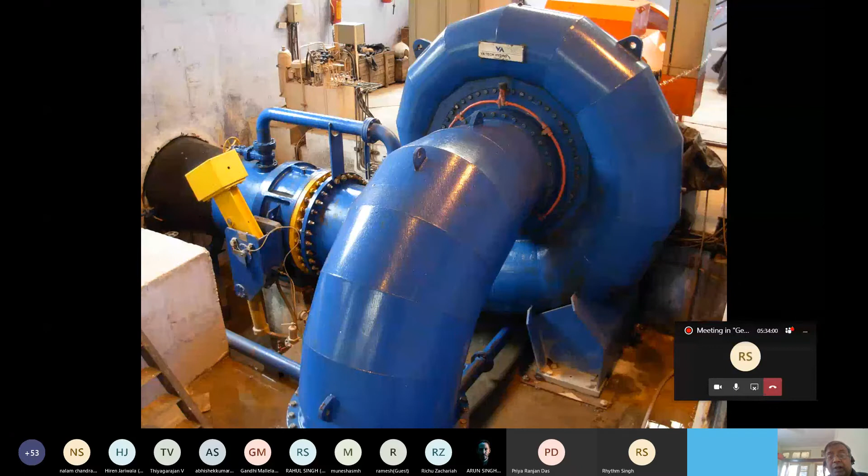Now, at the project we had this Francis turbine, and I told you in the morning. Now this is our valve which controls the operation of the machine with the signal coming from our governor.

So there are two controls here in this project - this is a fully open and fully closed position. And now in the Francis turbine, we had the wicket gates, which can - so there are two levels of safety here, which is there at all the projects.

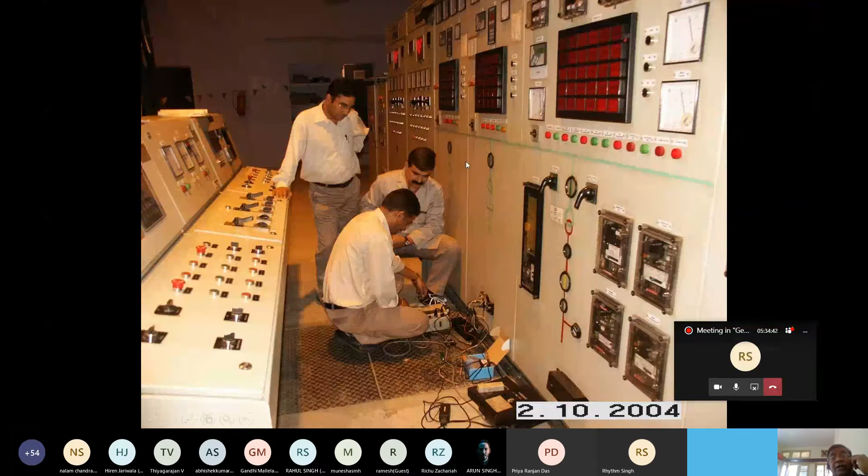And now these are the actual panels. You just see, and this is our IIT team.

These small hydro projects, when they are constructed at site, the subsidy which they are getting means they have to finally get all the project tested, whether they are generating as per the requirement, because it has been seen that getting a subsidy is based on the installation.

Suppose the project is of 10 megawatt, so they just prepare the report for 20 megawatt, so that the subsidy which was linked on the installation base - their contribution of 30%, because the project cost up to 30% is to be borne by the developer. Balance they can get funding from the state government, the financial banks, and around 1 crore per megawatt is a subsidy which is available from the central government.

Just to get a subsidy, they are inflating the installed capacity. So the government had decided that the final generation - if suppose it is 10 megawatt, they had just mentioned in their DPR that this project will generate, say, that much million units - so they have to, after the machines are commissioned, show that it is generating at least 80% of the units claimed.

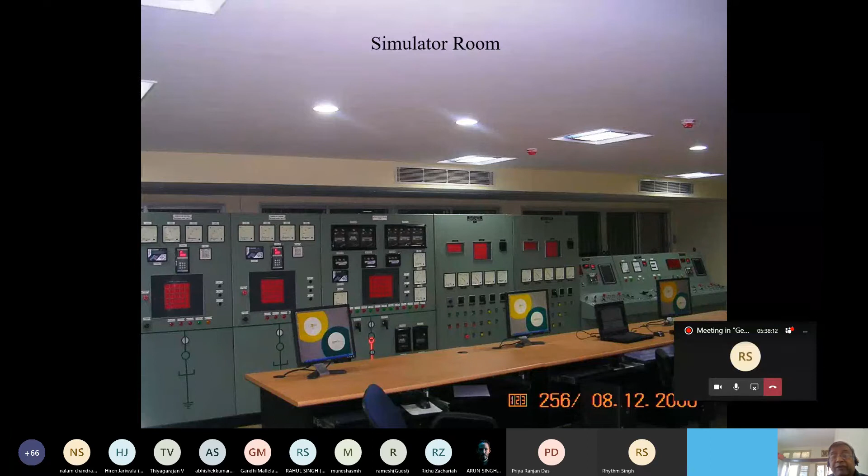When we commissioned this lab, we asked the operator from Rajwakti project, and the second project is canal based, so we asked the operator from Rajwakti. Similarly, for other projects we asked the respective operators to operate the system as they do at their own projects, and they confirmed that all operations here are the same as at their actual projects. All these operations can be done from the hard panels you are seeing in front of you.

We are having three systems, and these can be operated from here also.

Now I will show you the other project, a canal based project where we have an axial flow turbine. This is the panel at the actual project at Narangwal, and this is the hard panel available in our lab for this project.

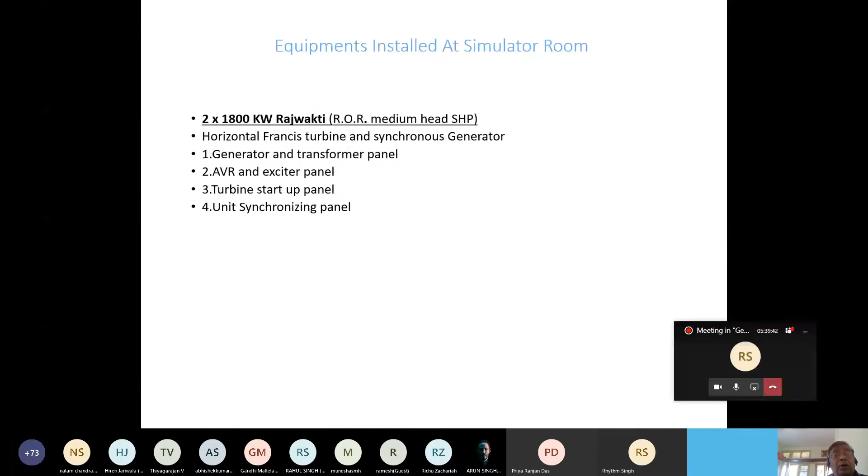We create a vacuum using vacuum pumps here, so the water gets lifted and falls over the runner blades, which start running. It is a vertical shaft with the generator mounted at the top. When we have to close these machines, we simply open the valve, break the vacuum, and then the water stops flowing.

These machines are very good because our expenditure on excavation is reduced, since they are around 2 to 3 meters higher and every machine part is above the water level. So if you want to repair or provide maintenance, there's no problem because the runner blades are above the water level, unlike normal machines where everything is underwater.

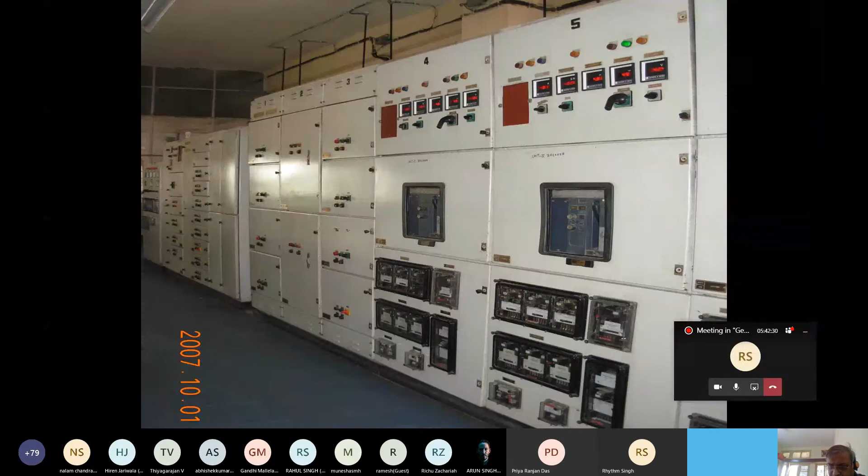Now, the panel you are seeing here: the actual panel and our panel show no difference, giving the same feeling as the control room of that project.

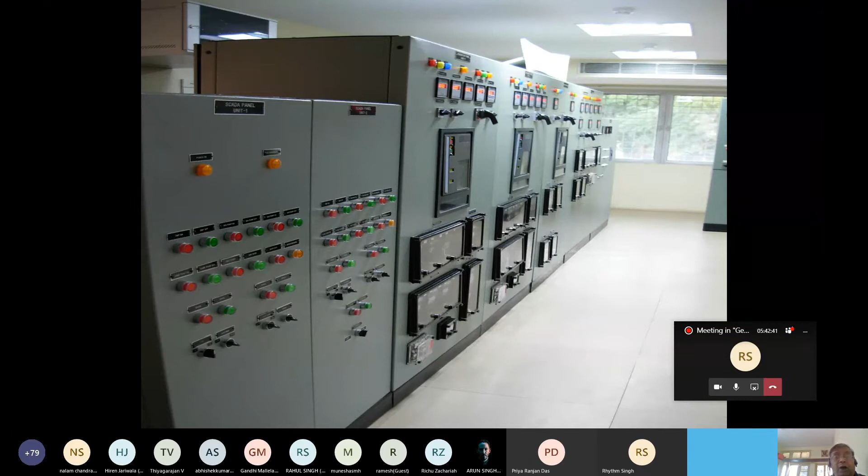The operations we simulated are the normal operations we discussed: the gate moving from 0 to 100%, so the discharge goes from 0 to the no-load position, developing runaway and rated speed, and then from there to full load, arranging discharge, since the discharge at your project can vary from maximum in summer to minimum in winter.

Hello, hello, please, is there any question?

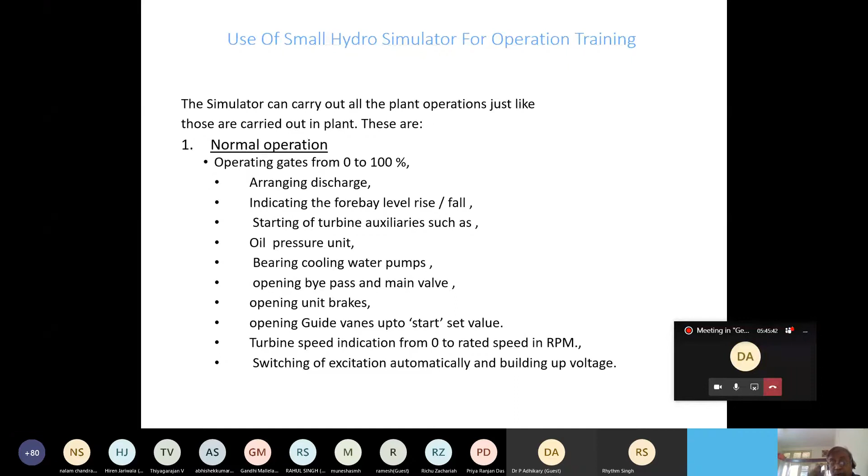So all these things are normal operations which you can perform in our simulator lab - opening unit brakes, opening guide vanes, turbine speed indication, switching of excitation system.

Now here the important part is the abnormal and emergency conditions. In a simulator, the advantage lies here - the malfunctioning of equipment. You have provided so many relays, and you keep assuming these relays are functioning well, but you don't know what will happen if these relays don't function.

What happened? When there was some tripping, there was a command that all equipment should be closed. So they closed the passage of the steam also. What happened? The pressure of the steam was building up, and finally it blasted.

So similarly here, what we do - we have simulated around 130 malfunctions which we can perform here. What we can do, because our project should work with cooling water, we cannot allow testing what happens if cooling water is not available in reality.

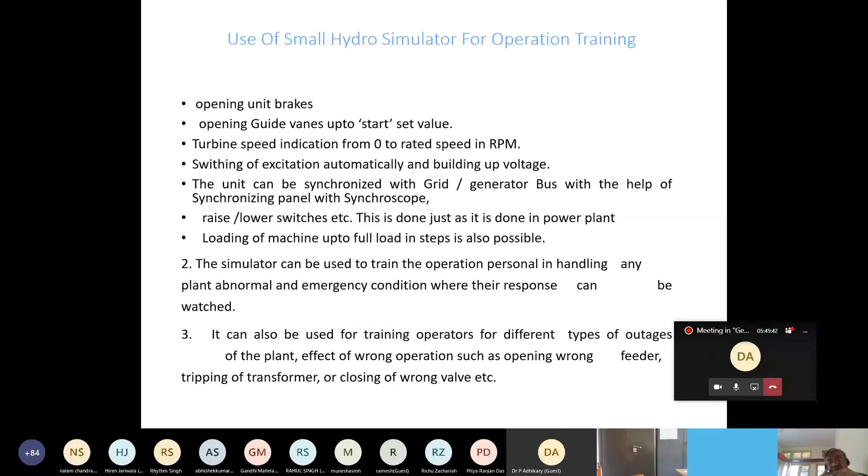So this is a simulator. Now I will show and discuss about the Rajwakti simulator screen, how it is working here.

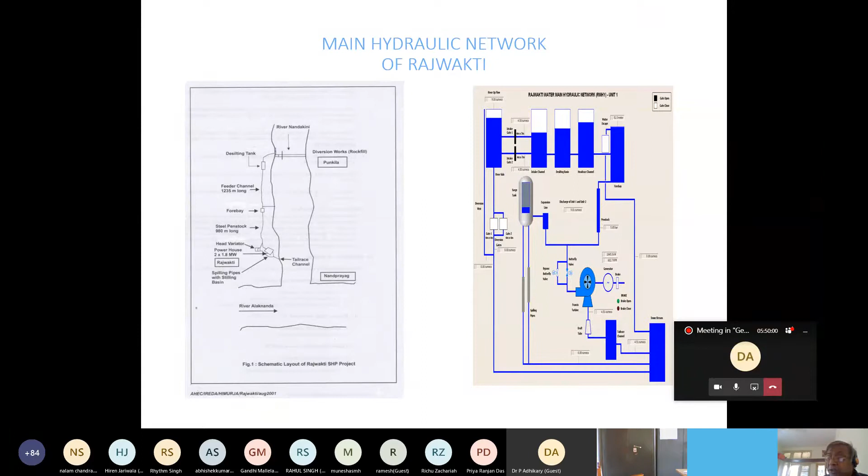On the screen you will see this figure. On the left side is the actual project at site, which is simulated graphically on the right side. Now you are seeing this is our river.

These three tanks represent the intake channel, the desilting tank, and the power channel. This fourth one represents our forebay. When the water level in the forebay rises, it comes through this spillway.

Water finally goes to the downstream side of the river. Now from this forebay you will see a penstock. This penstock supplies water to our turbine. From the turbine it goes through the draft tube into our tail race, and the tail race finally joins the downstream of the river.

Now this is a surge tank. What happens is when the machines close suddenly, the pressure rises and water passes through. So this surge tank has escape channels - this is incoming to the surge tank, this is outgoing from the surge tank, and finally water meets the river downstream.

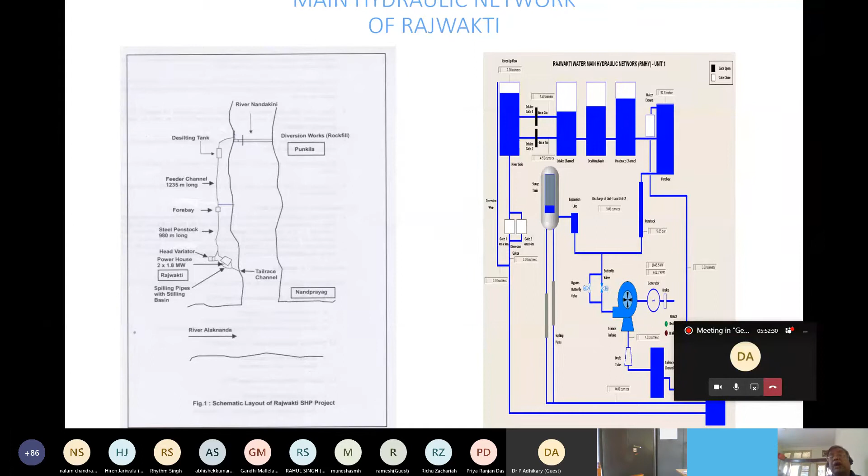So any variation which I had discussed earlier, all these variations can be reflected graphically by seeing the water level changing in the channel. It will take the same time as if you open the gate in the actual project - reaching the desilting tank, then reaching the forebay tank. Everything is simulated like this.

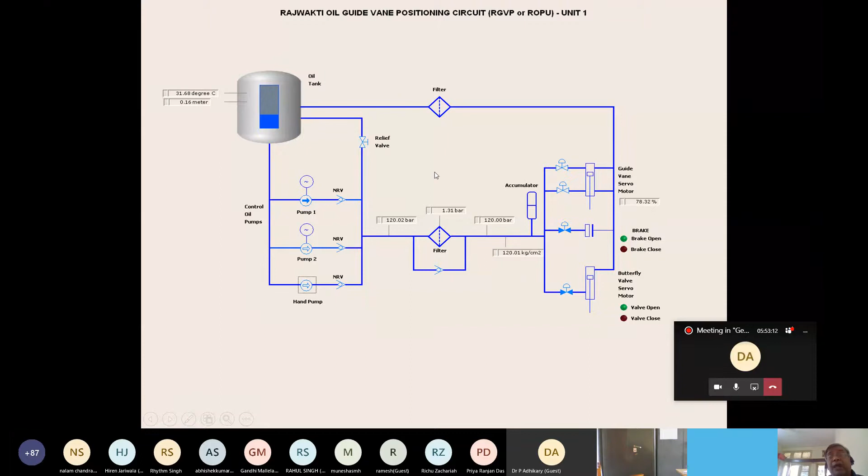Now this is the guide vane positions circuit. In the guide vane position you have oil in the tank, and you have a pump, because the servo motor needs a pump to pressurize the oil at the required capacity. These are the filters - basically we have two filters, because if one filter is choked, the supply comes from the other filter. This system is shown here.

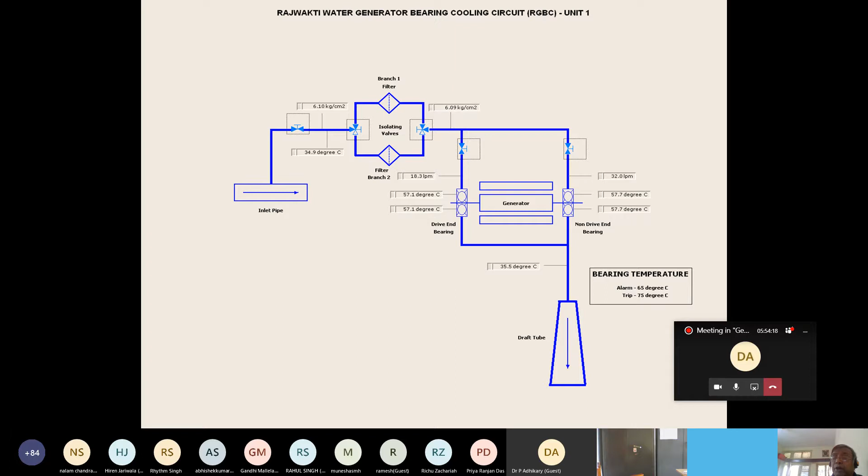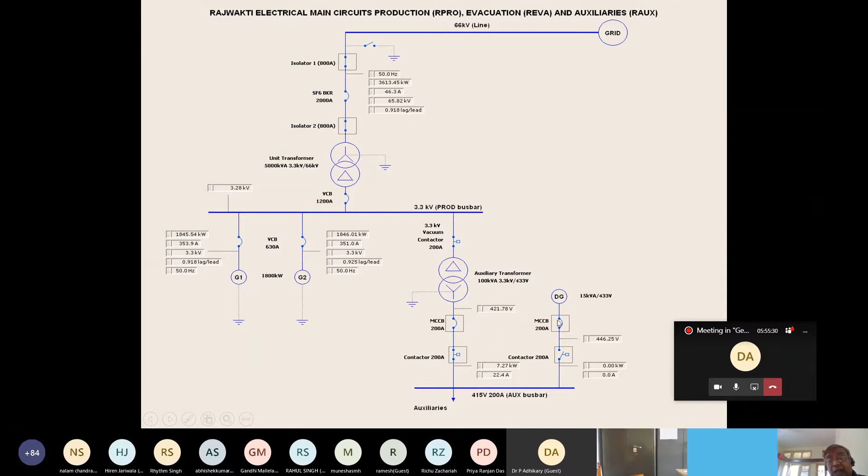Now on this side we have auxiliary transformer parameters, all displayed here. As you might know, on the auxiliary side, if initially we don't have any power, or if there is no power from the grid, we have a DG set. This is our 415 bus shown here, which is supplied to the 415 bus, and all the auxiliary systems are displayed.

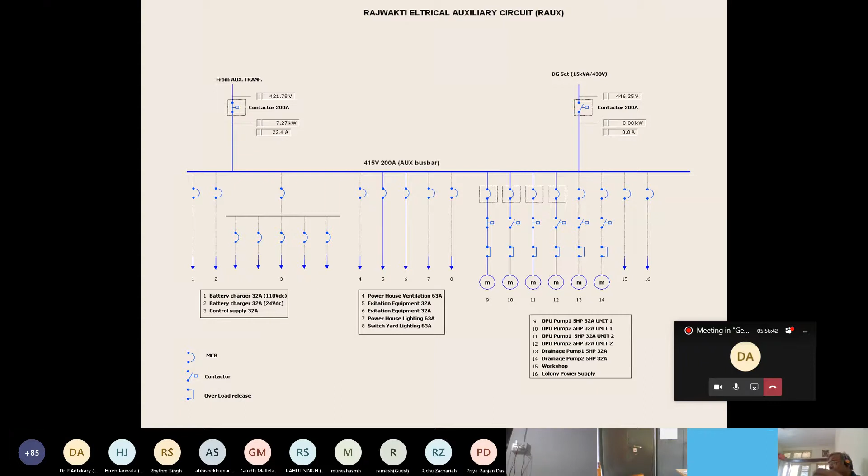So now if you have any question, or you know - earlier we used to have one course every month. This was free, funded by MNRE, and we had arranged some courses for Punjab State Electricity Board on their demand, changing the course content as per their need.

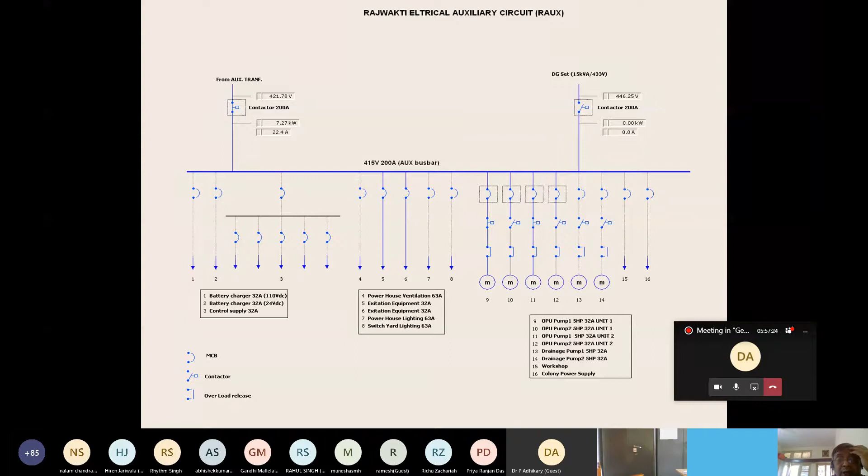So now this is the modeling part which we covered in my morning session. First we covered about the water starting time, about the velocity which will reach in what time, and I discussed about the classical function. This I had shown in the first example and discussed in the morning, that gate opening at rated load is not full, it is 94%, because the equipment supplier wants to have some margin for the opening of the gate to adjust their efficiencies.

Because when we purchase the equipment, all our parameters mentioned in our tender document are guaranteed. And if there is any shortfall in the efficiency, there is shortfall in the output, so it is penalized.

Actually, shortfall in the efficiency can be compensated by drawing extra water from the project. But if your machines are of poor quality, so generally acceptable efficiency of the machines is around 85%. And if the machines are of poor fabrication, poor quality, their efficiency can be in the order of 60%.

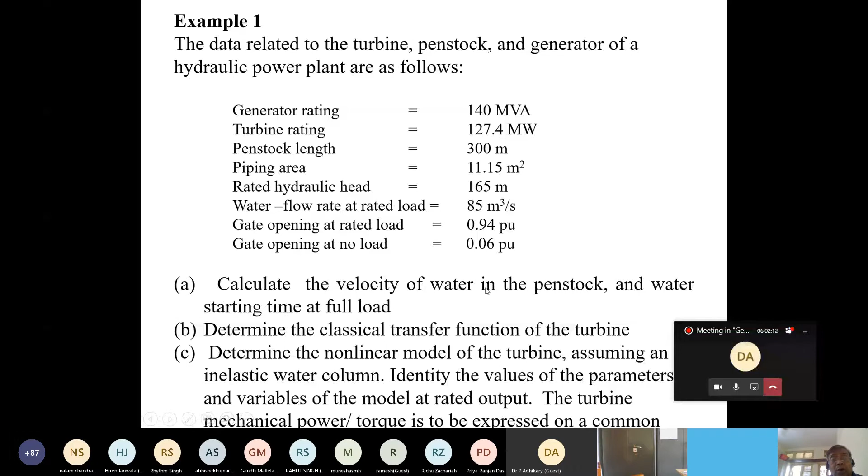So now if we had the parameters of this project, and if we have to develop a model of this project, I had calculated those. It is very easy to calculate the rated speed, because it is required to calculate the water starting time.

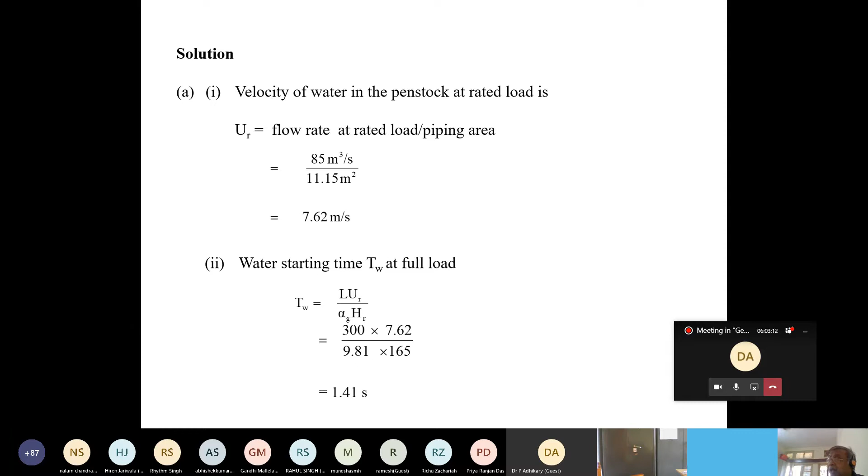Now, after that, we had calculated this parameter of our no load velocity. Just see at no load velocity will be here, and for our MVA base, we had taken 100 megawatt project as a base for this grid, just to know the effect of these projects on the overall grid.

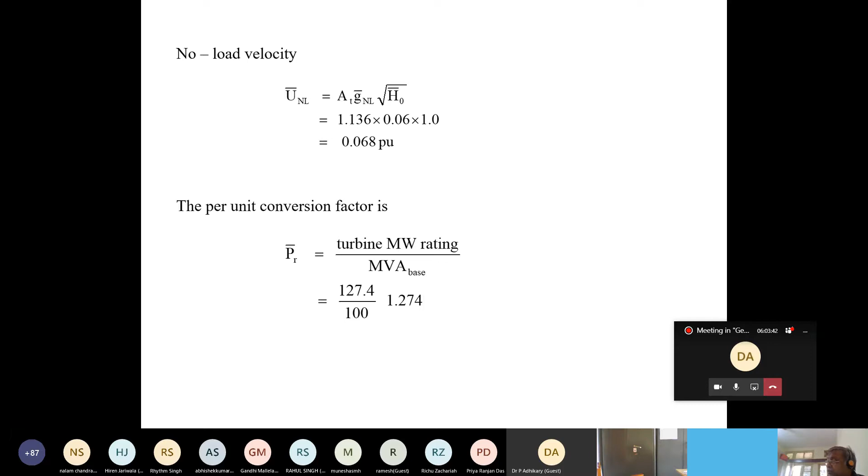In the second example, I had shown you the water starting time and the mechanical starting time. This was around 5 times higher than the water starting time. It means the machine requires a time to reach rated RPM that is around 5 times the time required for the water to reach the rated speed. So for that, we want to find out the governor parameter.

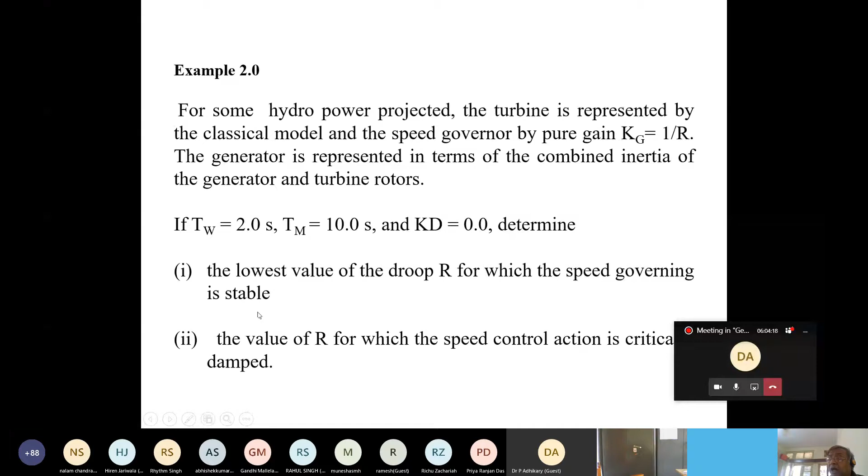This is the transfer function of our governor. This is the transfer function of our turbine. This is the transfer function of our generator. So this should finally be 0. We will get an equation which will give R, the gain which we had discussed, that is the ratio of gate opening and speed sensing.

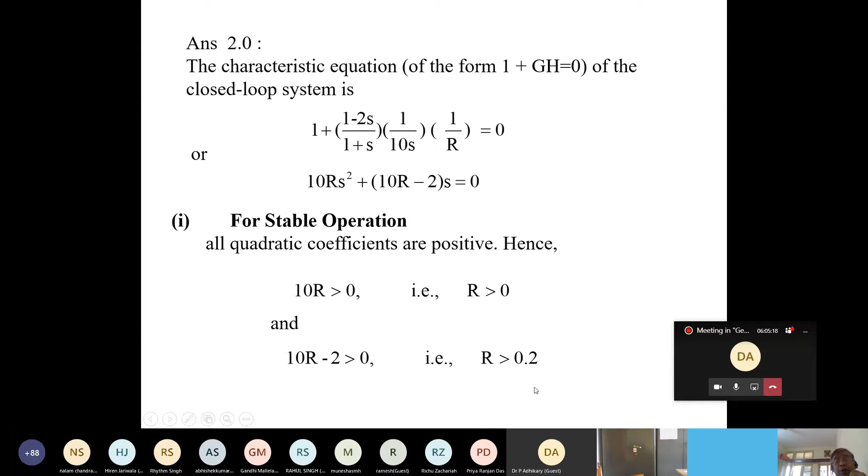So for that, we need all coefficients to be positive. It will be positive when this is more than 0. This will be positive, so this will be more than 0. So we are getting two values of R. From this point of view, our R should be more than 0.2. This means our gain should be less than 5, because 0.2 will come when gain is less than 5.

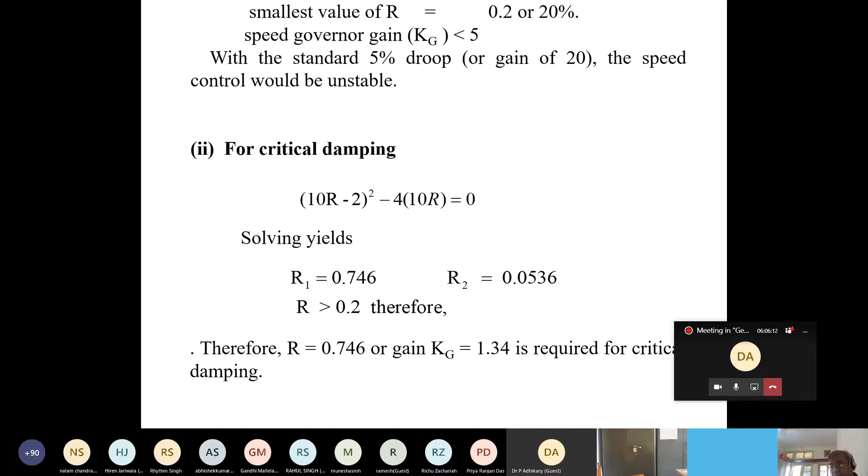And for critical damping, B square minus 4AC should be zero, and this gives that R should be 0.746. It means the gain should be, instead of 5, 1.34 for our stable operation. So these are the parameters, and now with these parameters we can adjust the setting of our turbine. A supplier, by seeing these parameters, will adjust our parameters.

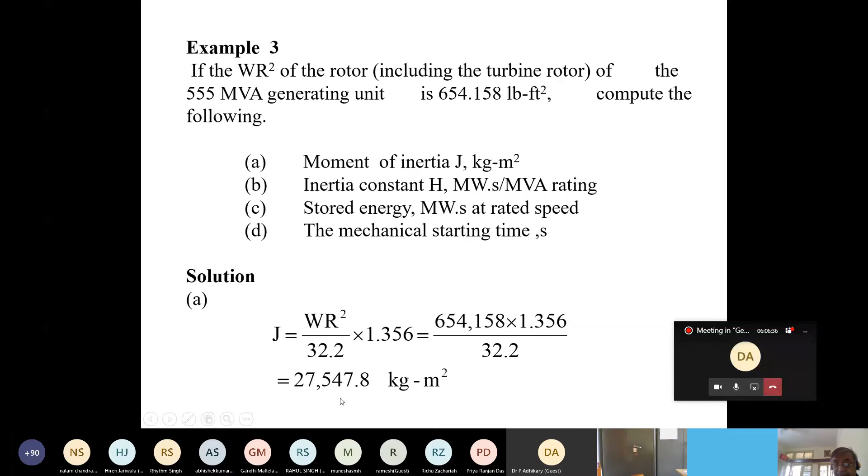Now, I had shown the parameters of our generator, where we have to calculate the moment of inertia constant, stored energy, and mechanical starting time. I had given a formula, which has been used to calculate WR square. Then the inertia constant, H value, the stored energy with respect to MVA rating, and mechanical starting time, for which we developed the relation.

So it is 2 times the inertia constant. So in 7 seconds, our machine will reach rated RPM. In this case, this is different than the previous one where it was taking 10 seconds.

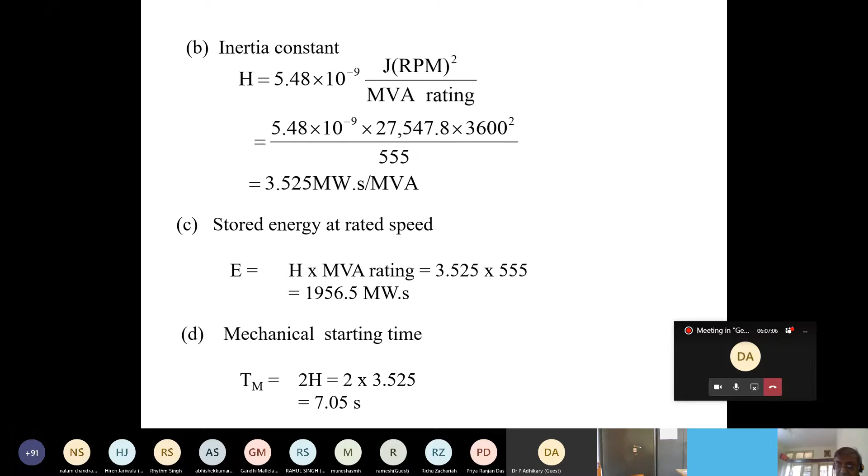Now, in the morning, we had discussed a lot about the different models and correlations which we developed. So I will present a case study over it. This is a case study which we had developed on the basis of all the parameters discussed in the morning, by developing different correlations for the design and for the cost. All these have been used in this case study of 5 projects on one of the rivers.

One project is project 1. This hydro project was the Bhilangana project, which is the actual project basically. In this Bhilangana project, 5 projects were sanctioned at different elevations. The first elevation was this one, 200 meters downstream. The second project came further 200 meters down, then the third project came. The fourth project was around 150 meters down, and the fifth project was around 125 meters down.

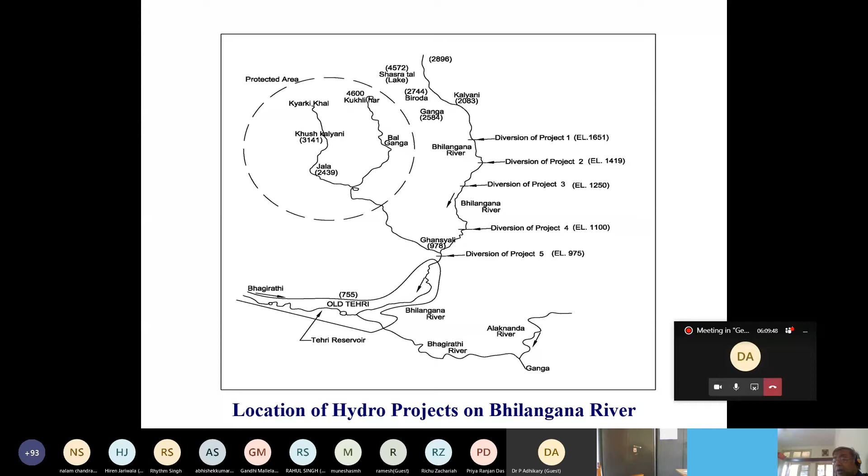So now I had shown the total area which shows all 5 projects at different elevations: project number 1, then 2, 3, 4, and finally project 5. The elevations starting with this one are 1651, then 1400, 1250, 1100, and then 975.

All these projects were having a catchment area. You know that the catchment area of this project will keep on increasing, because the catchment area is the area which collects the water for your project, and that discharge is available at the diversion location of our project. So when you go to the next one on the same stream, all the water coming from the first will keep on coming and will reach here. It means the area of the first catchment is already available, and some additional area contributes the discharge at this one. That's why the catchment increases from 407 to 457.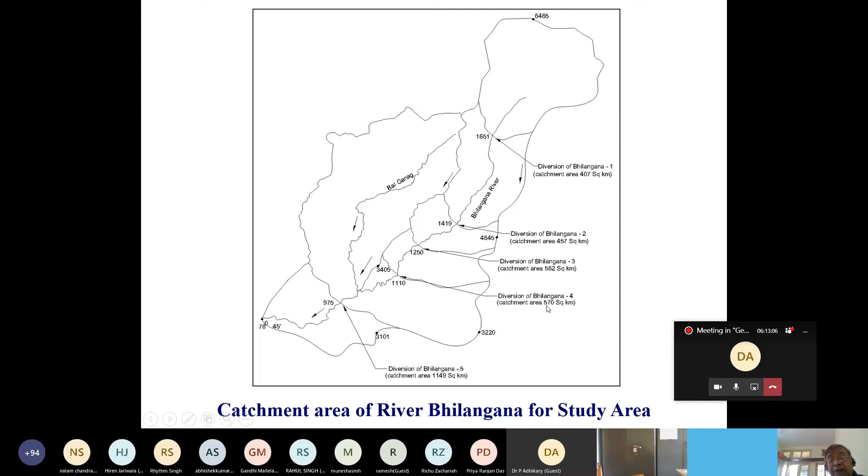Now these are the parameters which we discussed for all 5 projects. I had shown the bed level at which our project is located, the catchment up to that location, and the discharges. Generally you will find that discharge is always in the ratio of catchment area. So if the catchment here is double, the discharge available for power generation is just double.

Now because all these are bigger projects, we can store the water up to some level. So these levels are given so that we can calculate the head. Then the tailwater level, because the tailwater level of the first project should be higher than the intake level of the second project. That's why there is a difference of 5 meters here.

The second project releases discharge 5 meters above the discharge elevation of the third project. The third project releases discharge 5 meters above the intake level of the fourth project, and the fourth project releases discharge 5 meters above the intake of the fifth project.

So the difference of the tailwater level and upstream level is the gross head. Take around the net loss as 10%, so it will give you the net head, and finally it shows the installed capacity. Total installed capacity combined of all 5 projects was 97 megawatts.

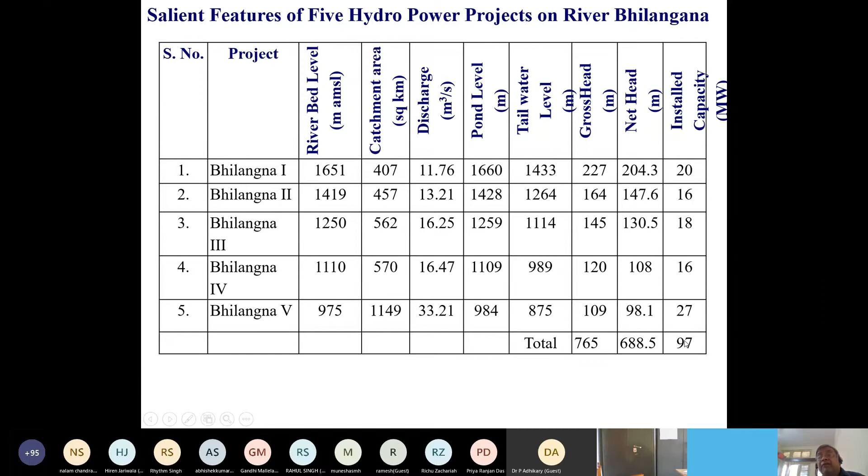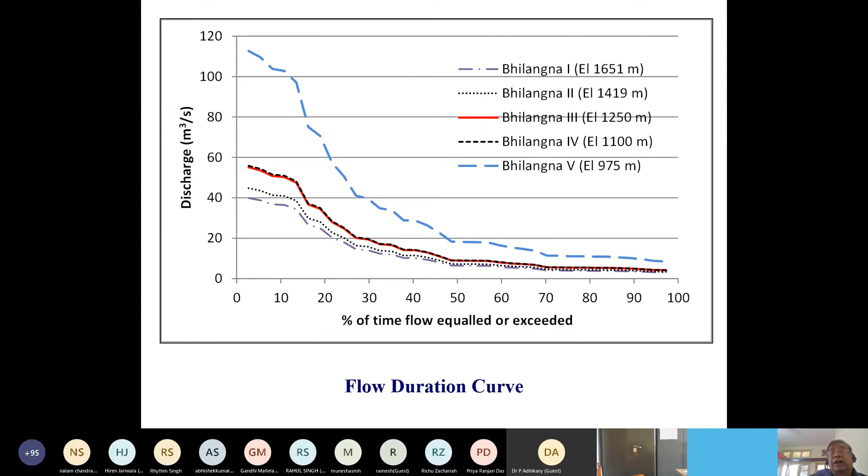Now this I had shown the discharge availability curve for all 5 projects, but I am seeing only 4 curves. This curve is superimposing because the discharge of this one is almost the same. Discharge of the red figure and the dotted one, Bhilangna third and fourth, is almost the same.

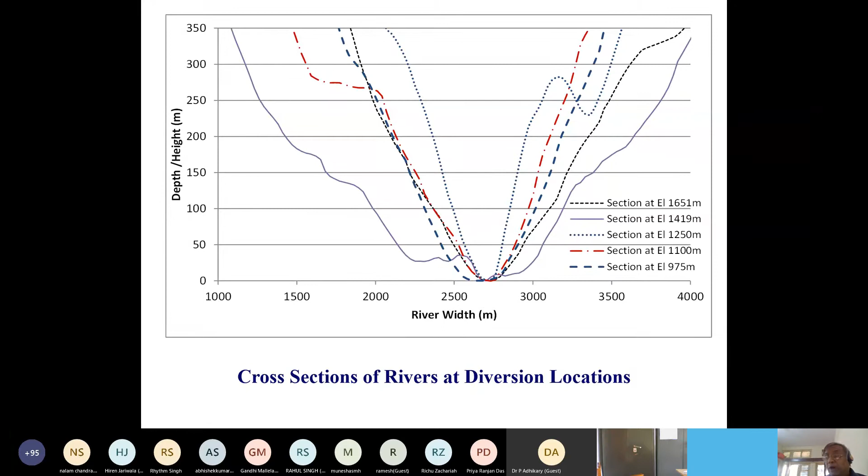Now this I had shown the cross section so that I can find the pond level of all these projects, so that I can calculate what will be the dam height at all these projects. This shows the distance from the project, and what will be the storage requirement so that I can plan my dam height.

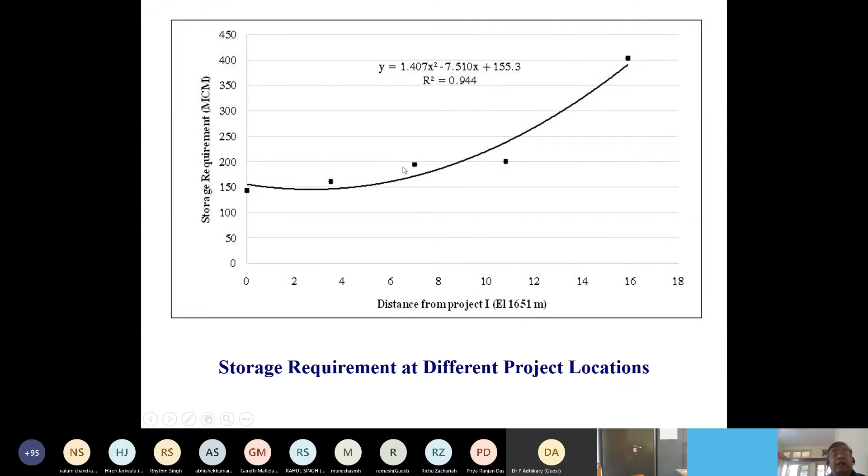Now, dam height and storage. If I provide a dam at different elevations, 50 meters, 100 meters, 150 meters, this shows how much storage will be available with me at different heights.

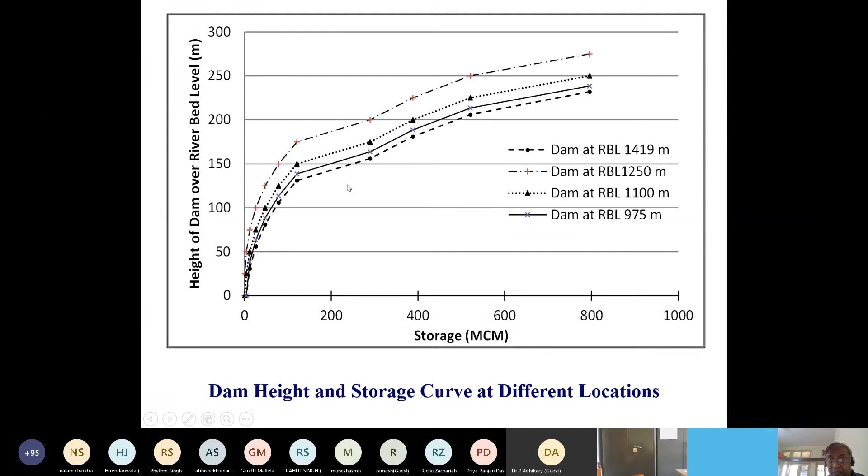I had taken 5 different proposals. The first proposal shows a barrage. If you recall, I had discussed the correlation developed for barrage. So in the first case, I had taken barrages at all 5 locations.

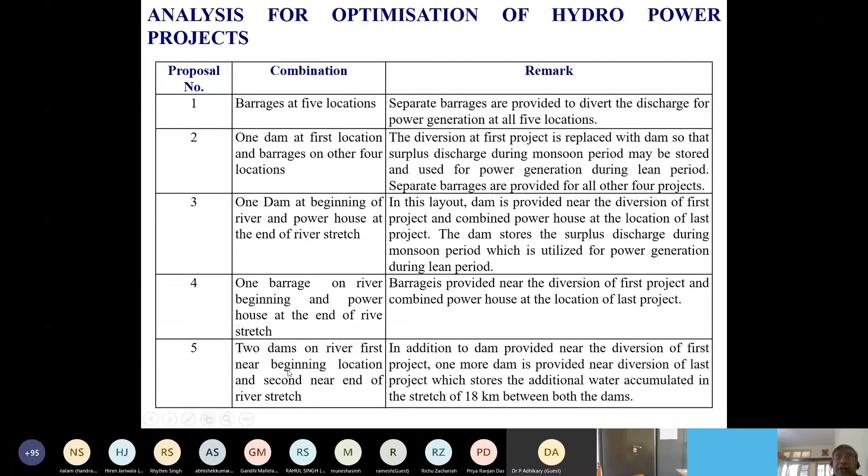Then a different combination: dam at the first location, barrage on all 4. Then I had taken a single dam with only one project, dam at the first site and the power at the end. I had taken one barrage at the river beginning as a single project, one dam with powerhouse at the end, one barrage with powerhouse at the end, and one with 2 dams with powerhouse in between. So 5 different combinations have been tried.

Now I changed the option. Instead of barrage at the top, I had chosen a dam. This dam will provide the water, store the water, and during winter also I will get the water for power generation. So almost I can have the same generation throughout from this project.

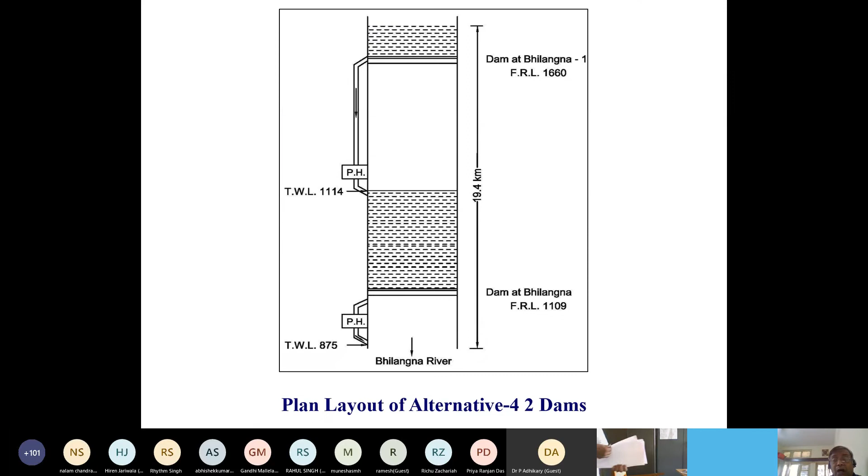Alternative 4 is 2 dams, because of this one. Alternative 4 is 2 dams.

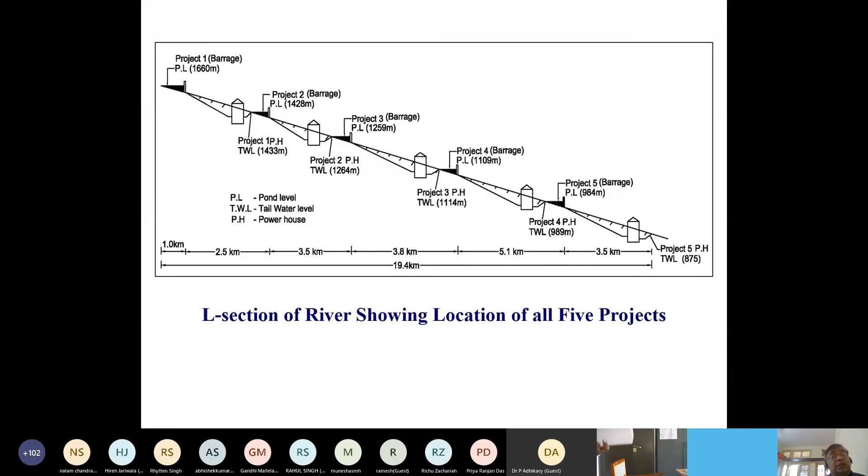Maybe in the figure description there could be some change. Alternative 4: one barrage on the river and powerhouse at the end of the river stretch. So alternative 4 is this dam, and we compared this alternative. Yes, the barrage is this one, alternative 4, and the powerhouse is here.

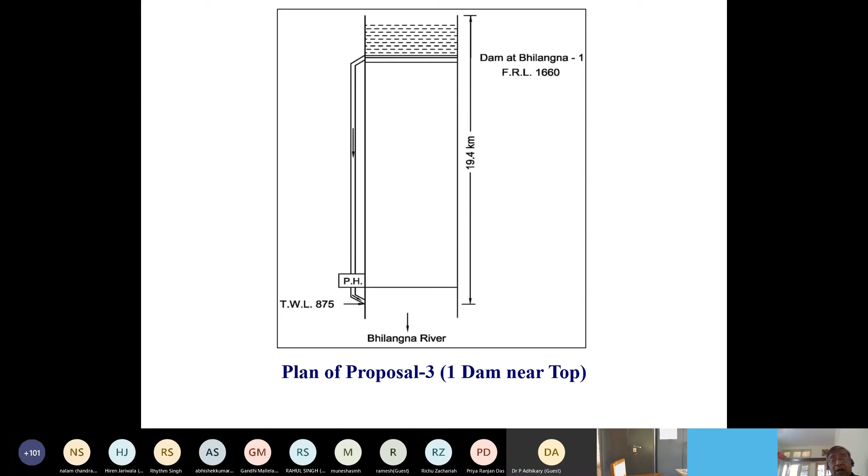So because the cost of other structures is not there, we can compare this alternative with the dam alternative, where the cost of dam was the factor. One barrage at the beginning, and the dam alternative is proposal 3, where we are getting continuous water.

So we compare this with the dam alternative. Although there is no much difference in the capacity, the generation has reduced drastically from 620 on the dam side to 370 on this one, and the cost has come to 3.3 rupees a unit because the main cost is the dam. Here we had seen alternative 2 and 5.

It has 1 dam, it has 2 dams. So both the dam options are always equal because there are 2 proposals of 3 dams: 1 dam, 2 dam, and 3 dam. So all 3 are very costly—14 rupees, 15 rupees, and 22 rupees.

So alternative 5 is with 2 dams. This becomes very costly, and comparable are alternatives 1, 2 and 4, which are the cases of the barrages. If we have a single barrage at this one, we get the cheapest one. But if we have barrages at 5 locations, we have alternative 1.

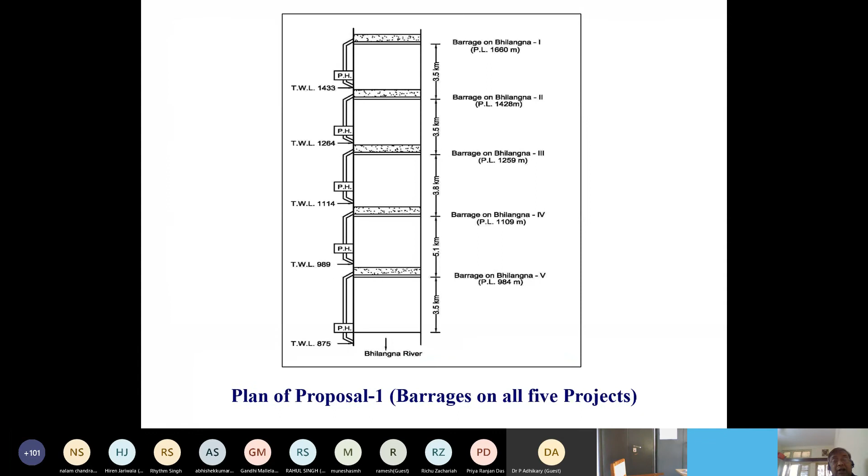So maybe we can say alternative 1 and alternative 4 are comparable. Alternative 1 is all barrages—although the power generation is more with this alternative, the generation is reduced drastically, so even the generation cost is higher at alternative 1. But alternative 1 can be acceptable, and that is actually a project—this is the actual project which is available at site.

When we have a barrage at all 5 locations, our head available is such that we need slightly more money on the electromechanical side. If we are having a single project, we can appreciate at project number 4 why the cost is less—because of a single barrage at the beginning and powerhouse at the end.

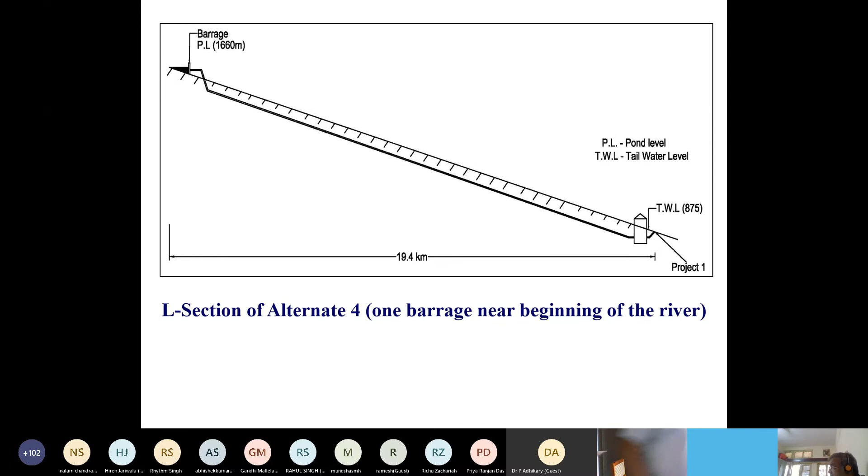If you go to the Maneri Bhali project, where the machines are in the order of 50 megawatts, and in the range of this one, the turbine size is much less, maybe around 2 meters. So if your head available for power generation decreases, the cost of E&M works increases drastically because the size of the runner increases. That's why in alternative 4, although we are generating less, the cost of E&M works reduces drastically because we have an 800 meter operating head for our machines. So we save a lot on the equipment side.

In this study, it was concluded to accept alternative 1 because we are generating 512 million units in place of 370 million units. This is an actual case also, and this study shows that although the cost is more, we can accept this proposal because it gives a lot more energy generation.

Now we have around 15 minutes available. I want to have a discussion about the generation cost, what are the components of generation cost, how we are calculating it. I will spend 5 to 10 minutes on this issue. If you have any question on the portion we covered, you can unmute and tell me.

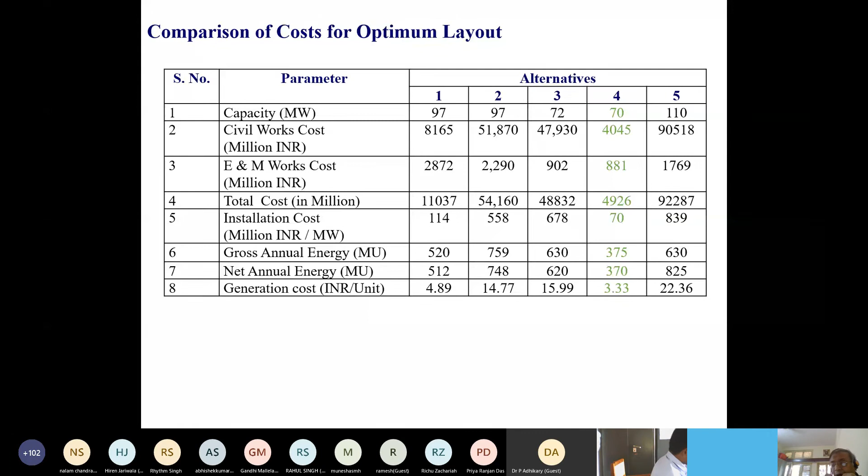Hello, am I audible? Anybody? Am I audible? Yes, sir. Okay, yes. Any question regarding this?

Good afternoon, sir. Sir, I want to ask which type of generator will be used in a hydro power plant, and on which basis? Because we have multiple generators in the market: induction generator, synchronous generator, PMSG generator. So which would you suggest for the power plant?

Actually, the synchronous generator is the most successful generator so far. For smaller capacity projects in Punjab, the induction generator with capacitor bank is used, because the problem with induction generators is that you require reactive power also. Induction generators with capacitor banks were used at 8 projects in Punjab, but they were of smaller capacity. Generally, you will find everywhere the synchronous generator being used for these projects. Thank you, sir.